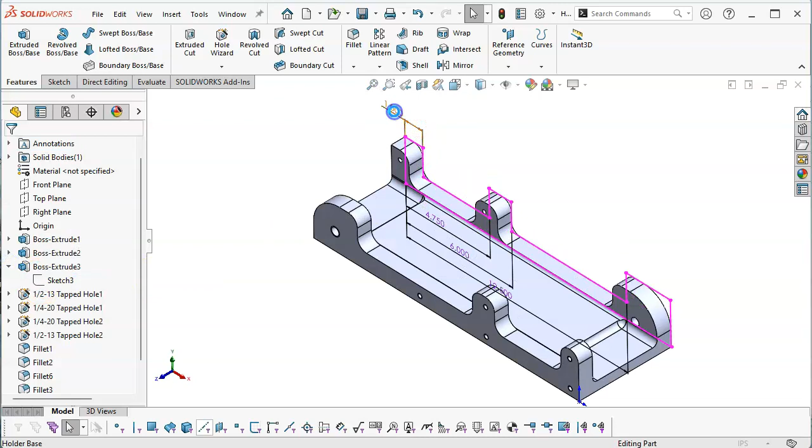Okay, the things you notice after you hit save, we're going to need the 1.5 inch fillets there. 1.5, got an extra decimal there, 1.5. Go ahead and accept. And then on this side, boss extrude 3, that actually came up to be 0.75.

Oh, and I shouldn't have picked that one. I didn't pick that one. So let's rebuild.

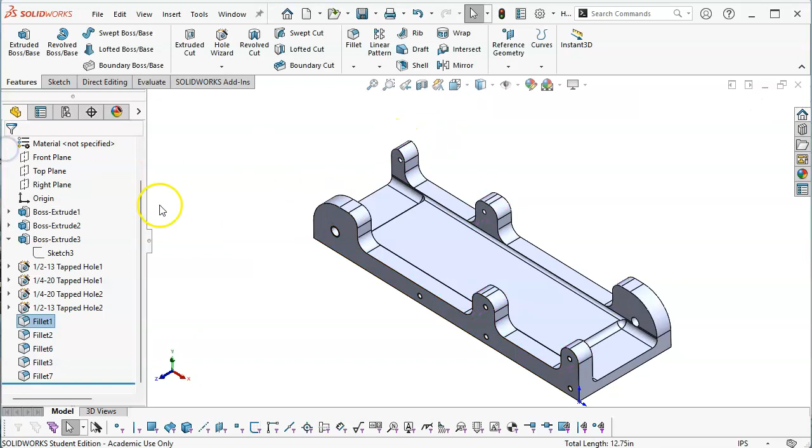And this is going to look a little weird. All right, so on that one, I would be prone to trying to make it 0.375, so you ended up with a nice arc instead of that weird point, or that vertex kind of coming up. But okay, we'll go with it.

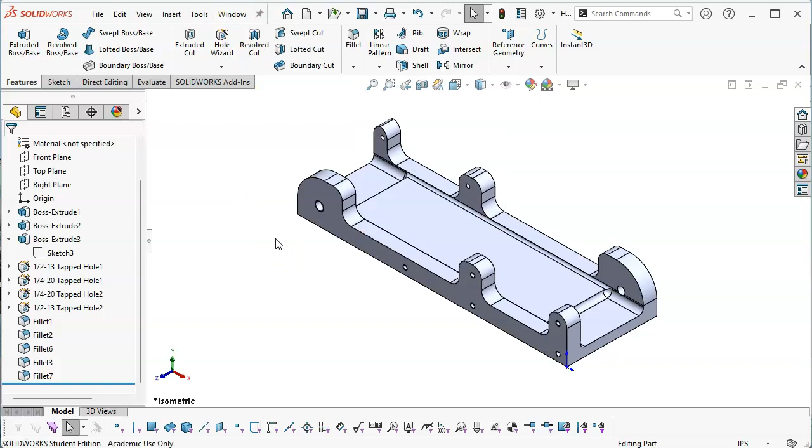All right, since this is the first part, if I check my window real quick, this is the first part to go into the assembly. And so file new, and we'll pick up our assembly.

It is in metric, which is not that big of a deal. And we'll select the holder base. I'm okay, there's no rotation that I need to do, so I don't have to worry about that.

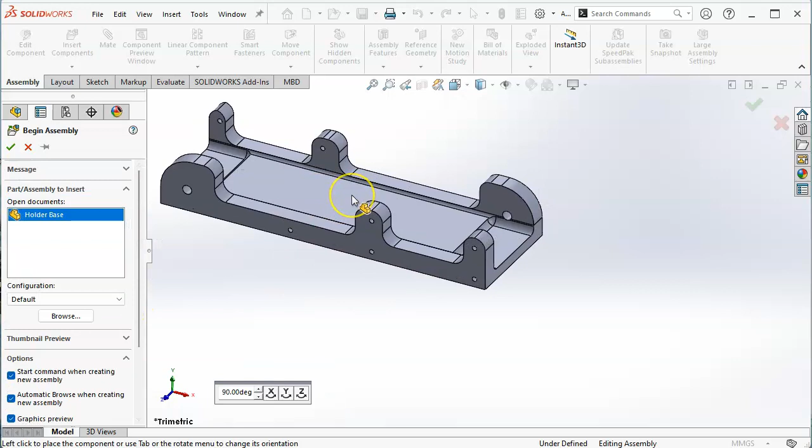Or the right click and rotation. Again, this pop-up box, show rotate context toolbar, if you're not seeing that, that would be the first place to check. I still have one computer system that for whatever reason, it's just going to rotate on the right mouse button.

And most of the time, if we've done our design intent when we bring the part in, it's going to be pretty much in the position that we want.

All right, so just a quick note, I've said it in previous projects, I don't think I've said it in this one. If you need to make adjustments, see something better, this is the time to experiment and do what-ifs and make those choices.

As the mechanical designer, if this is handed to me and they say, hey, we need to design review, reverse engineer, they're no longer available, whatever the situation is, I'm going to look at doing this with the best manufacturing ideas and processes that I currently have.

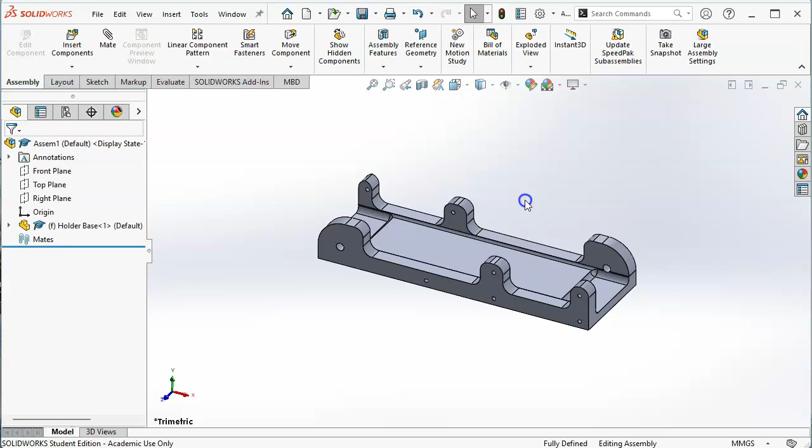So if this was a casting 50 years ago, great, but I still look at this and I kind of shake my head and go, no, I wouldn't be doing it this way.

All right, so insert components, browse, and we're going to go find the holder side and bring it in. All right, so this is a good place to look at our geometry.

And I could edit it here, but keep in mind I can just open the part. If I edit the part, it will edit it in context. There's too much going on here, so let's just open that part.

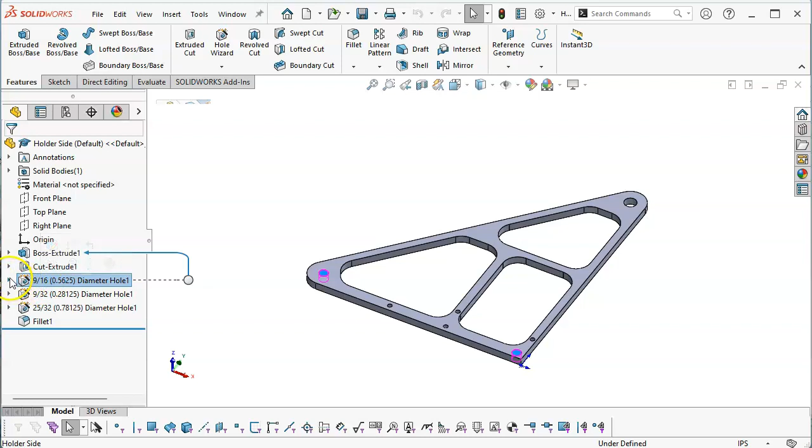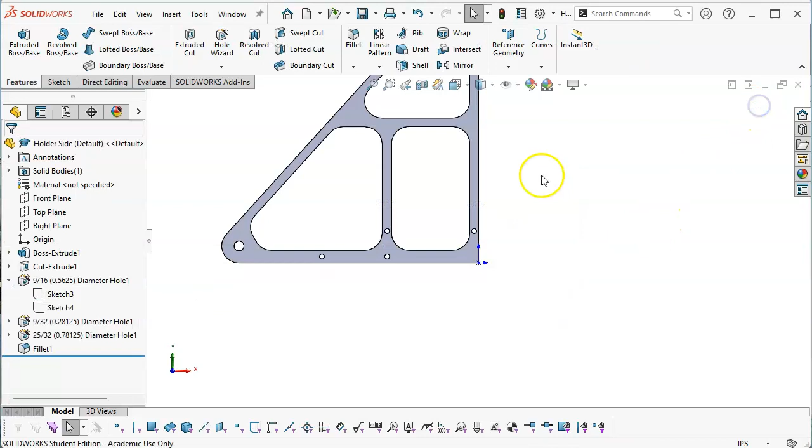If I wanted to verify those numbers, I could make those driven. All right, so just having those there as a what-if.

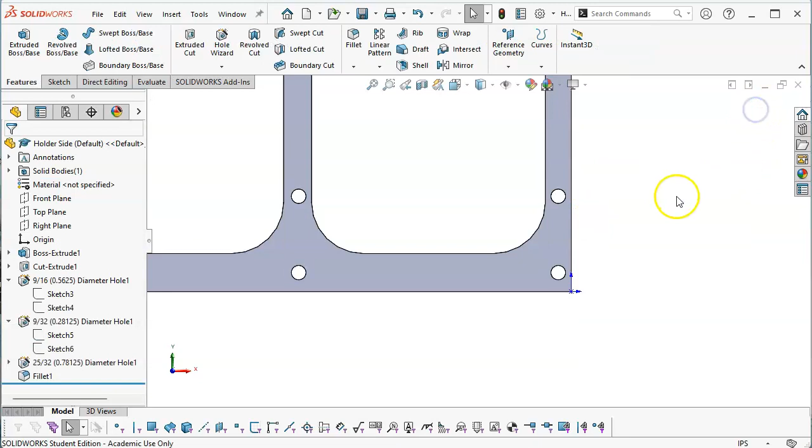All right, and then all of these dimensions, we'll just go back to the point and select control-select vertical, control-select horizontal. And now that we've kind of determined that that is correct, I can close that, let it rebuild.

All right, and then this is going to go to the mate. Coincident, I missed the pop-up. And now that we're in the mates,

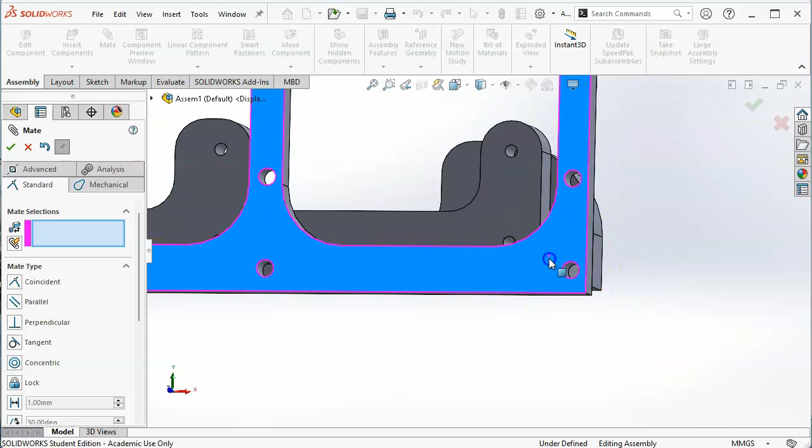I can just go ahead and select my geometry. I don't have to hold down the control button or anything. And notice that we're a little bit shifted. That one looks good, so we'll go ahead and accept.

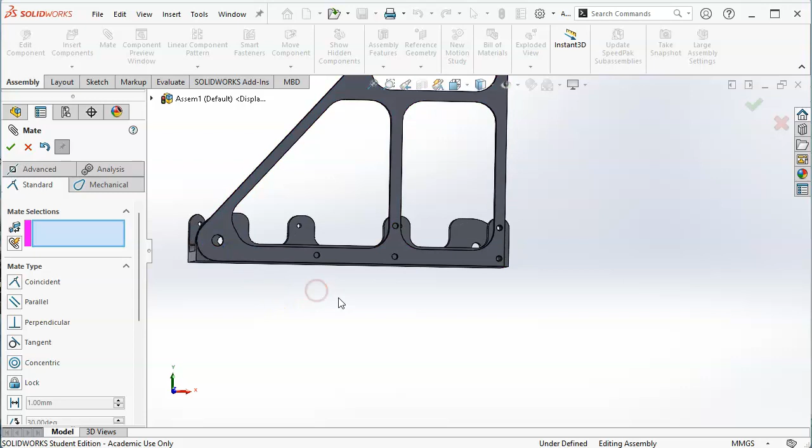That still says this can rotate. So it looks like I missed a dimension somewhere. So either I reversed one or changed one. Since that did not play well...

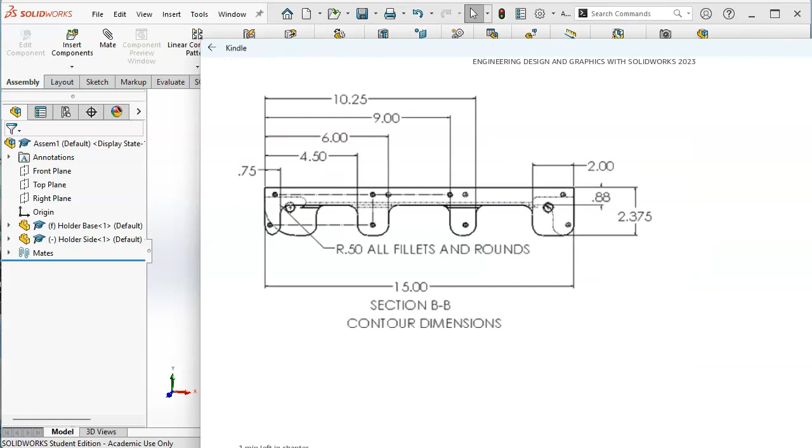Let's go back and double check. 0.5, 0.38.

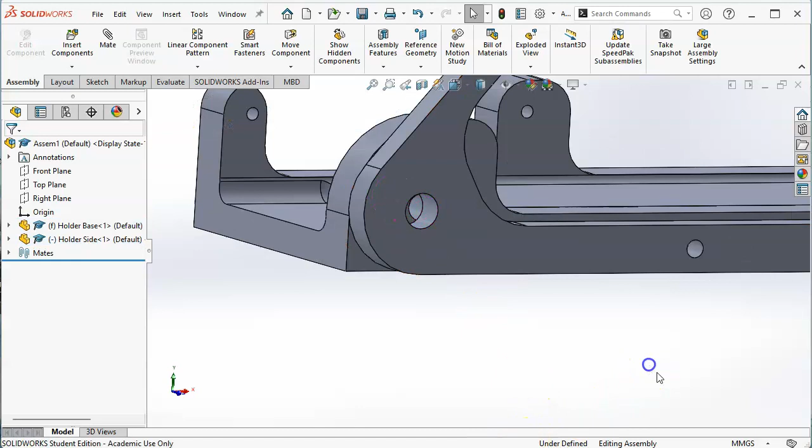Well, let's use our measure tool and find out. Select and control-select. And those are off by a quarter of an inch. And if we go to measure those, 6.35 millimeters, a quarter of an inch, and 6.32.

So let's go ahead and change that over to inch, pounds, and seconds, and double check where I missed my dimensions.

Okay, so since I got, when I changed this one, I wasn't looking at the print. That seems to be the quarter inch because I just automatically made that vertical.

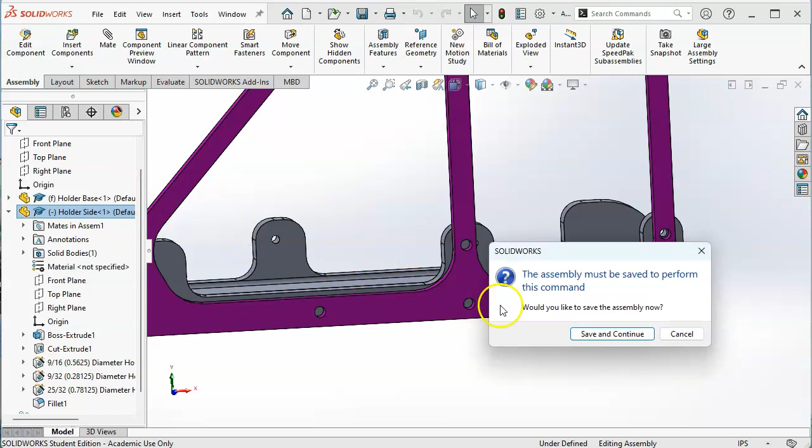So this is a situation where, since the geometry is there, I'll probably just go ahead and edit the part. Save the assembly. So this is my 4-link.

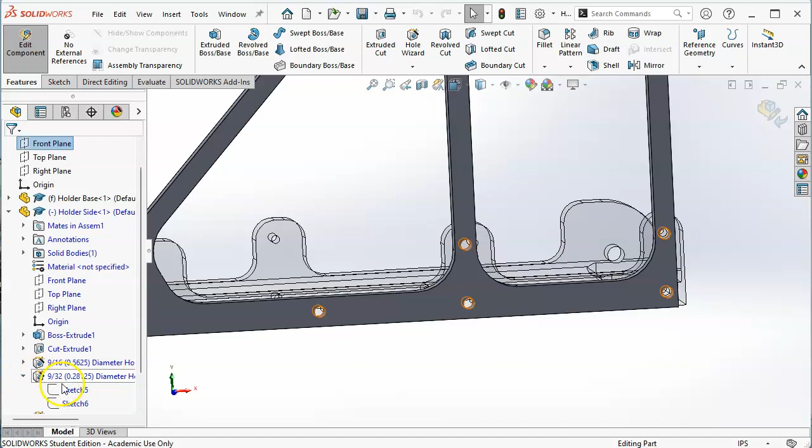All right, and the 4 links come back to the number of pivot points. So everything saves, and at 9/32nds through, I'm going to edit that sketch.

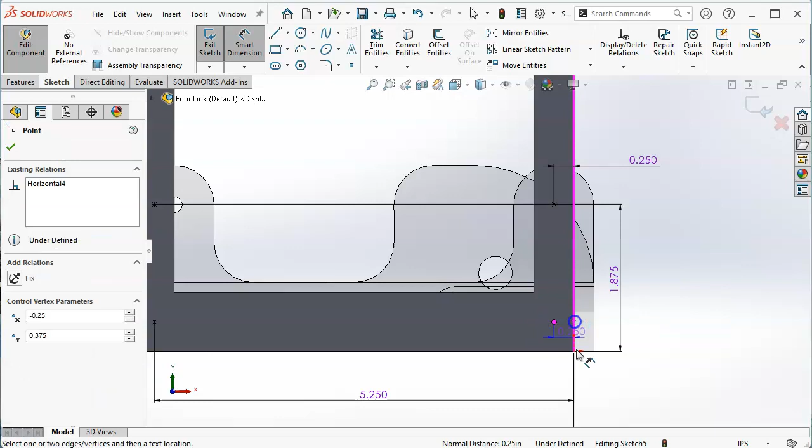When you are editing in context, the other parts go into transparency, and the part that you're editing is in blue. I will still recommend that you be a little careful with using that until you are familiar with the process, and build in little by little. Then once we edit out of the part and rebuild, it looks like I did the same thing.

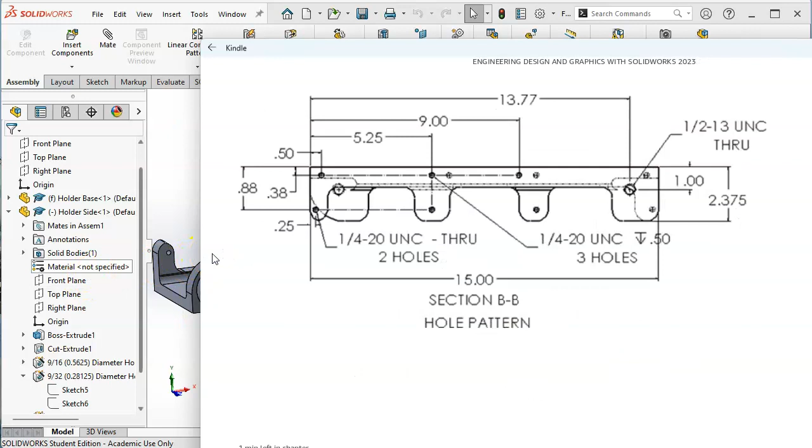So this one, 0.5. So I missed all of those. That one's offset, that one's offset. There it is, it magically appeared.

All right, so since I made those vertical, let's go ahead and hide. Hopefully the multiple iterations as we go through that process, those types of things that do show up or get missed or aren't apparent will be revealed and corrected as we go. So that was the other 0.25.

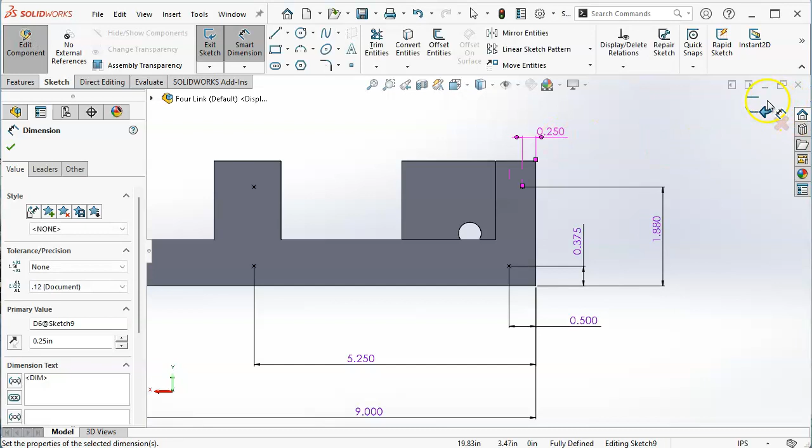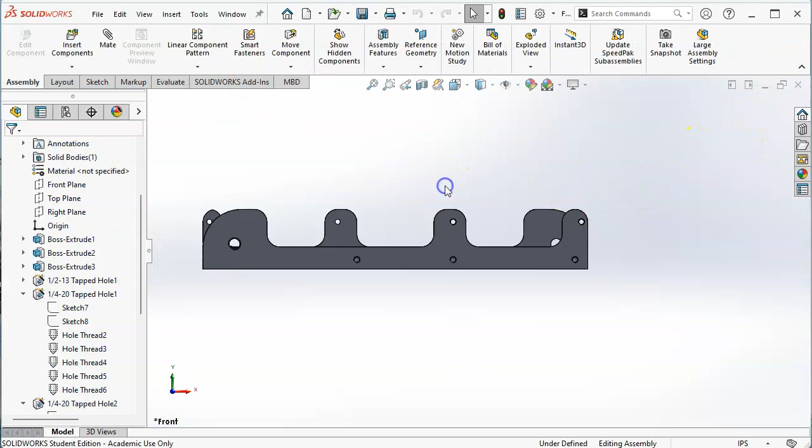And then on this side, we can edit that 0.25. Yep, sure enough, I did it on all of them. Okay, so edit - the part gets closed. And we go back, right-click, and show. If I now have everything correct, all right, we're in pretty good shape there.

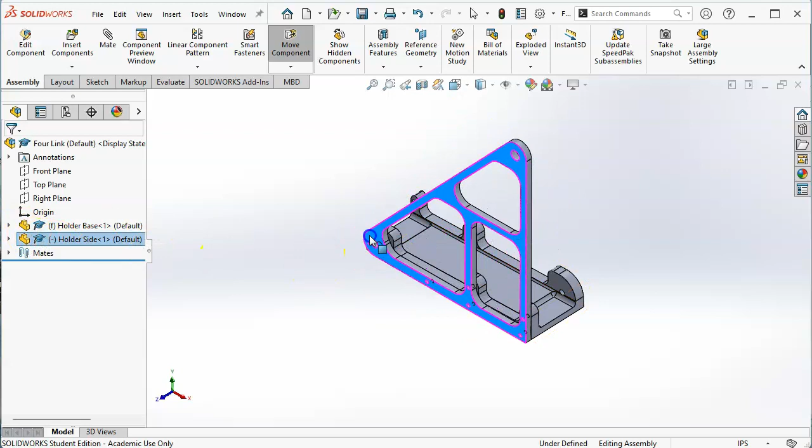All right, so let's bring in - no, it is able to rotate. I look over and I see a minus sign and it's able to rotate. Pick the 2 holes, so we'll go concentric.

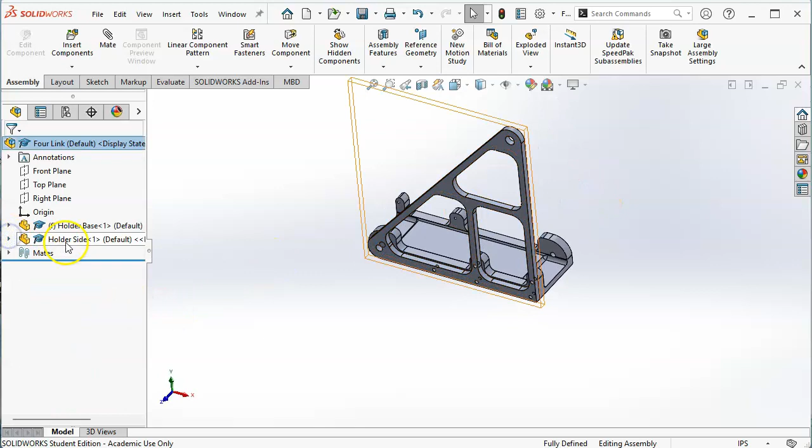You know, it is kind of overkill that one goes to a 1/2-13, so I don't know what kind of loads they're expecting at that point. Yeah, it's a little bizarre.

All right, so let's see, that's in the same position. This face and that face are going to be coincident. Then I'm going to flip the mate alignment so it comes back around the other way. And we want to double check those hole locations for this side.

And concentric. No, we're not locking the rotation, and no, I'm not flipping the mate alignments. So that's all okay. Control select, and concentric.

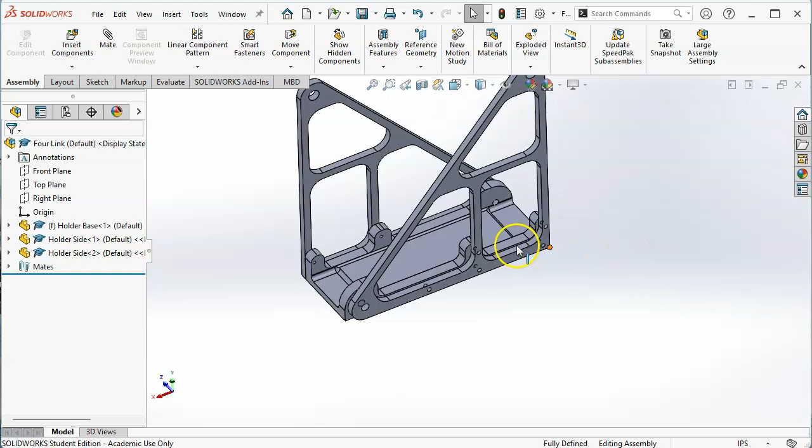And if you don't recognize those symbols, it is something that you can hover over and have it pop up, do the tooltip, and let you know what it is.

Let's see, let's just go ahead and - well, I thought there was an exploded view somewhere. Maybe that was my exploded view from last time.

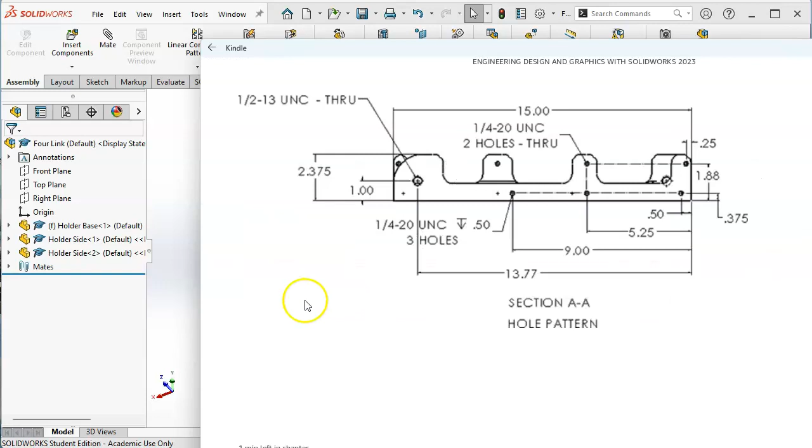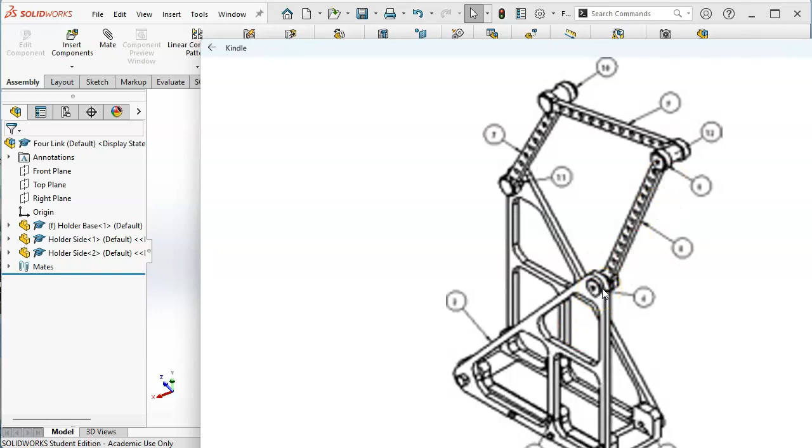Screw. Now that one definitely - that looks like maybe the spacer is to the interior, or the spacers are on the inside.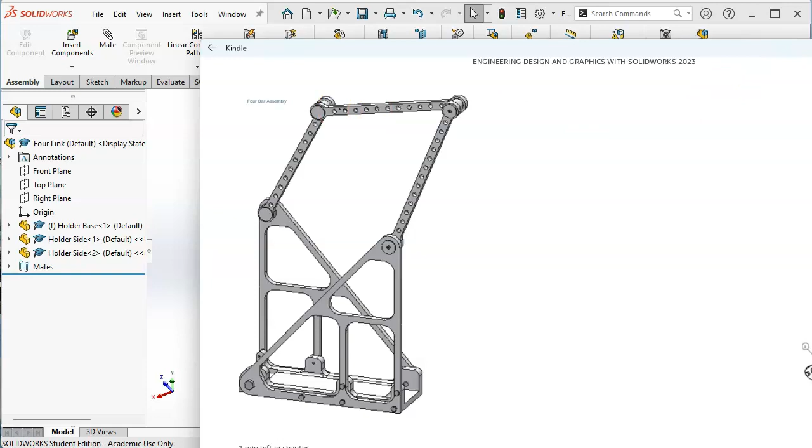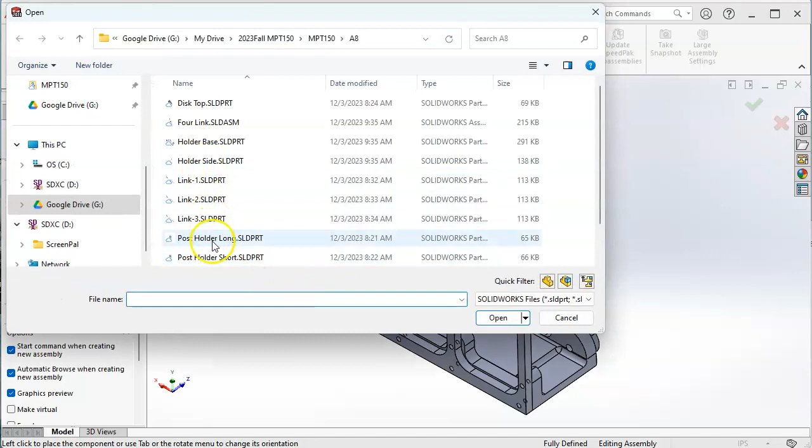Okay, well we need to make a decision, so let's go ahead and bring in the short post, and we'll get it into position. Insert component - we're going to browse post holder short and put that in place.

And I'm just going to go ahead and assemble one at this point. So concentric. Locking the rotation.

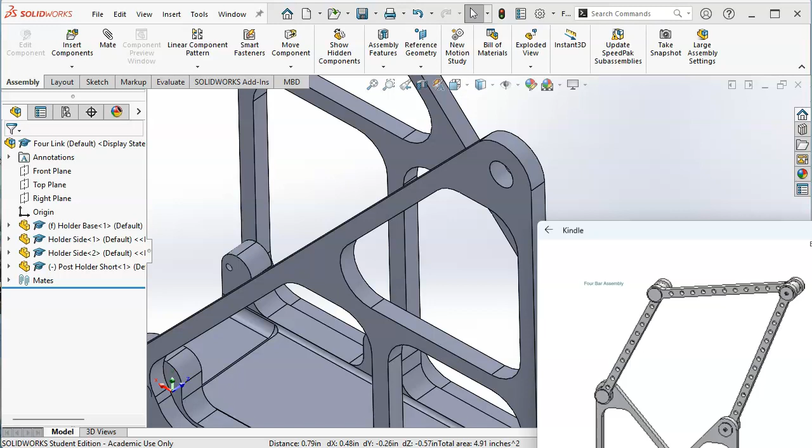Let's see, it kind of looks like that is the disk. So the disk on the outside, let's bring that back. For the initial, I'm going to say that that is going to be coincident.

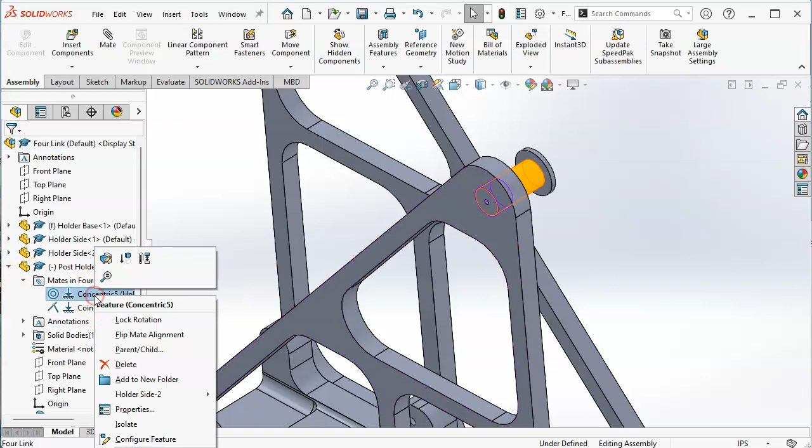Since I didn't see the pop-up, I'll just go back and make the concentric, lock the rotation on the concentric. So, all right, so that is...

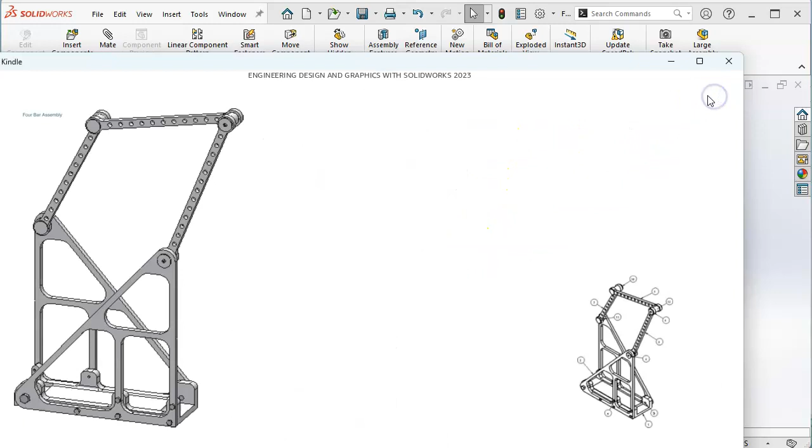Looks like item, well, 4, 8 - it's either 6 or 8. All right, so 8 is link 3.

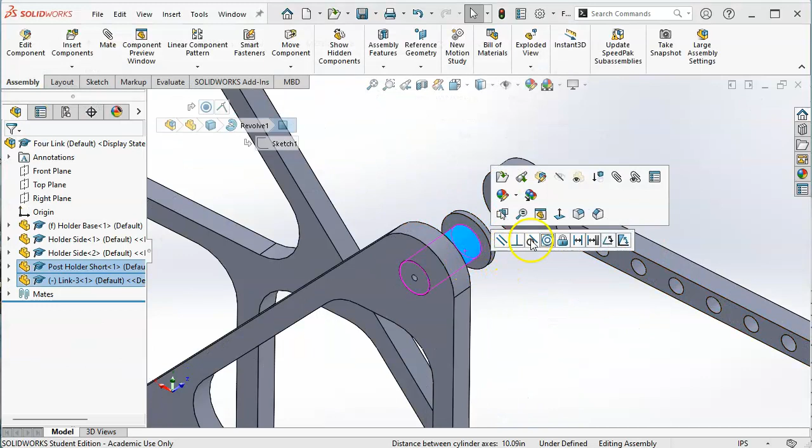So let's bring in the link, existing, browse link 3. And we'll go concentric. No, I do not want to lock the rotation.

Oh yeah, I didn't bring in a spacer. So let's go with the short.

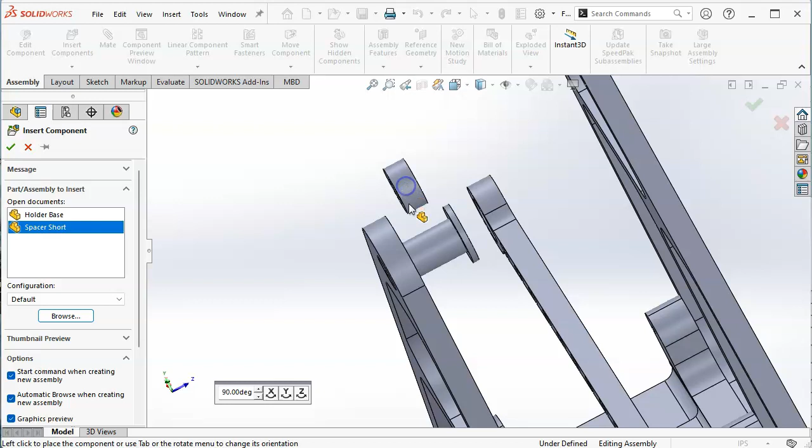And most of the time, I would bring in one of them first, concentric. And no, we don't need to lock coincident. And then...

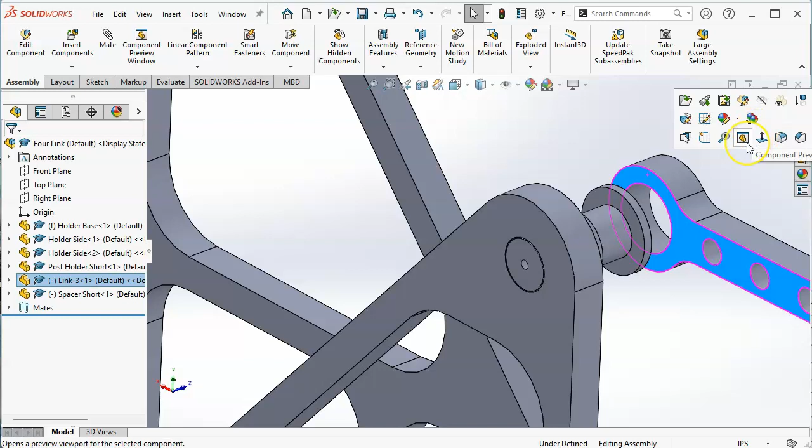Concentric. Yeah, I want to say, looking at this, even with the stack up, I might have missed those spacers last time. Still a pretty good gap there.

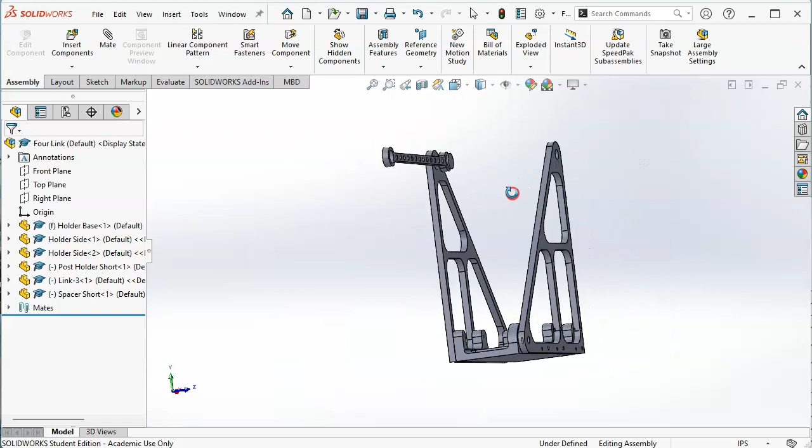A lot of float. All right, so let's see if with the spacer - maybe that one was the long spacer, and we still have contact.

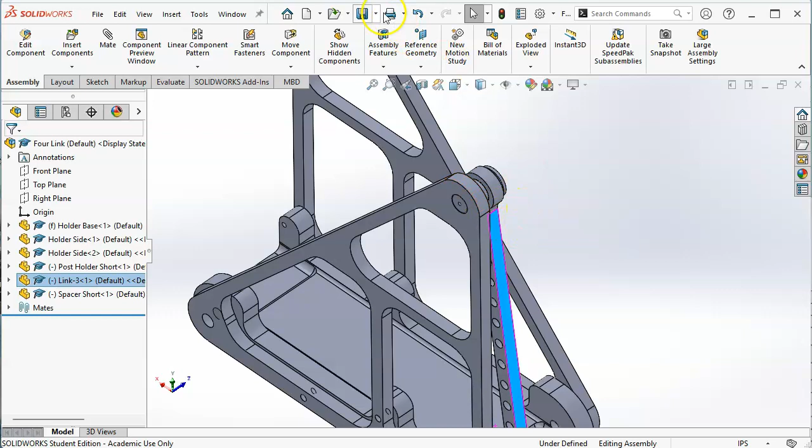All right, so I'm not too worried about the drawing here, but I don't want to get too long on the video because this is where I got myself into trouble. So I'll make sure to rebuild and save.

So on the off chance, I'm going to - let's see, I think that's just off screen somewhere.

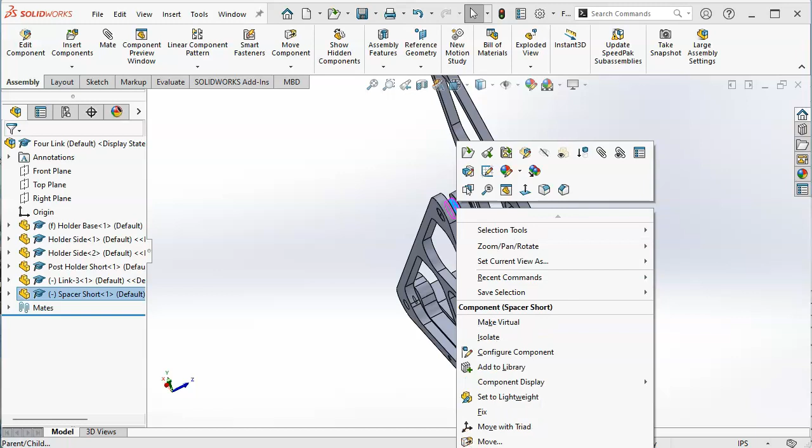There is a replace mates and entities, replace components option. So we're going to browse, and I'm going to replace that with the spacer long.

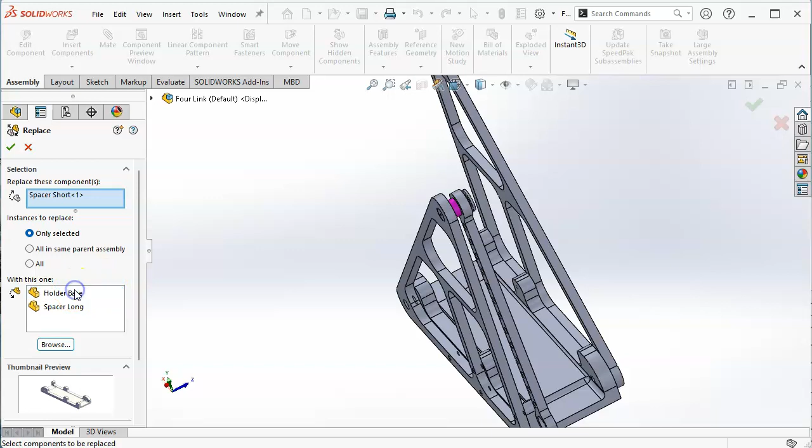And new. I'm not sure why it even picked the holder base, so only selected.

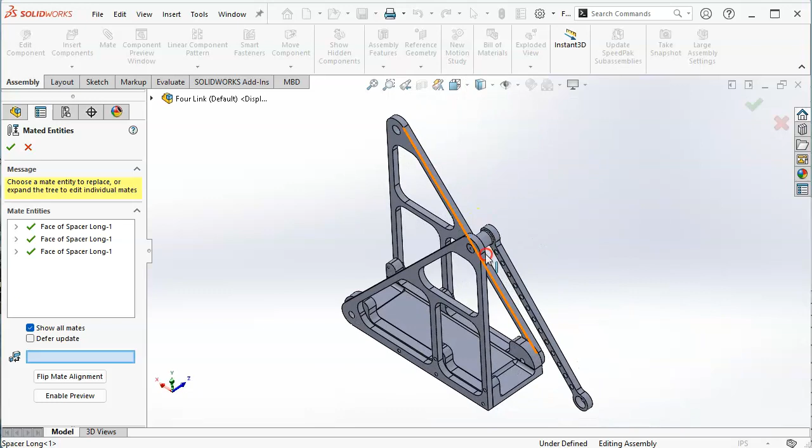Hopefully that doesn't do anything too weird, but that just kicks it. Yeah, that just kicked it all the way off. Alright, so that clears, which kind of...

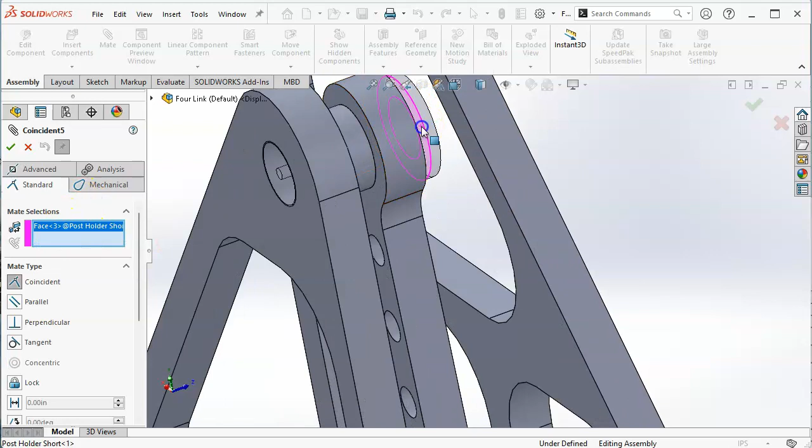Let's see if I can Control Z. The other thing we could do here for our coincident is clear out those selections and go to that face and to that face, and accept it.

And I am still in collision. Alright.

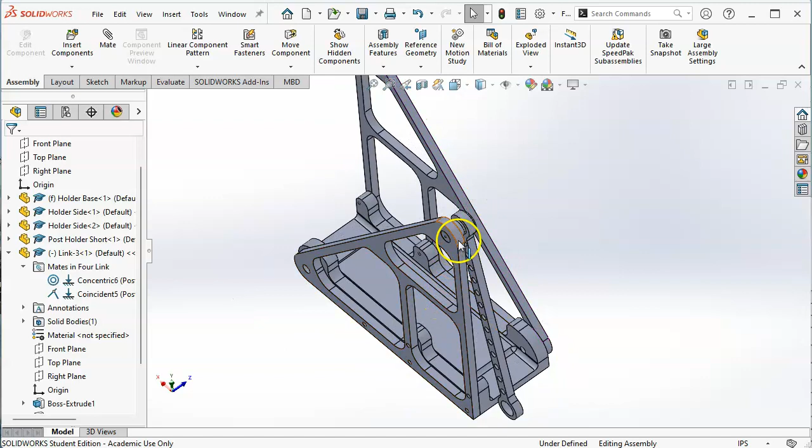So at this point, I still need to bring in the bearing. So I'm going to jump ahead. You should be comfortable enough to stop at this point and replace, or delete and reinsert.

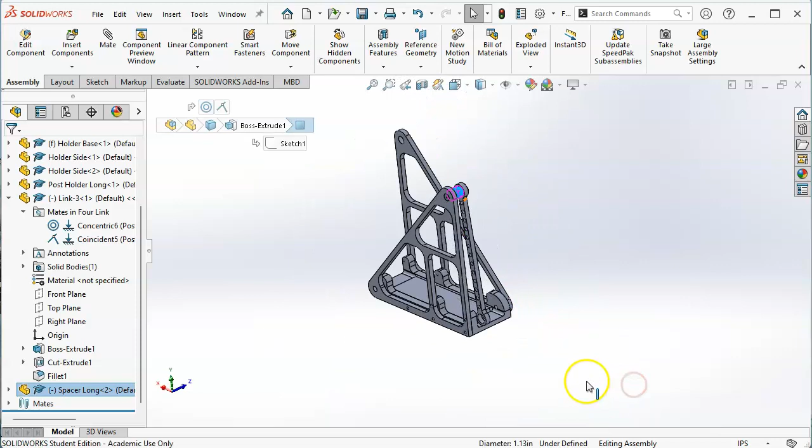Okay, I made my replacement and analyzed the result, and have a little bit of interference. So the 2.38 still doesn't quite line up, and I still need to put the bearing in, but we have the clearance there.

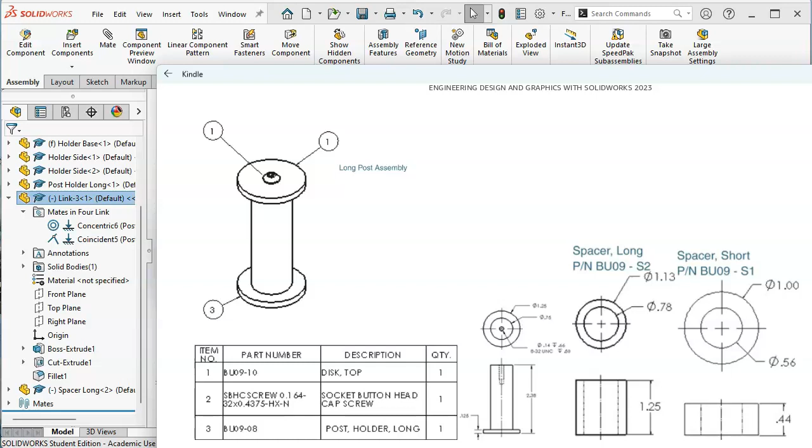And I checked the 1.25 and the 2.38 and the 1/8 inch. That doesn't quite line up. If we had the 2.38 from there to there, then I think that will give us the desired result.

So I wouldn't want to inset this 1/8 of an inch and then stack up. We're going to put this in bind.

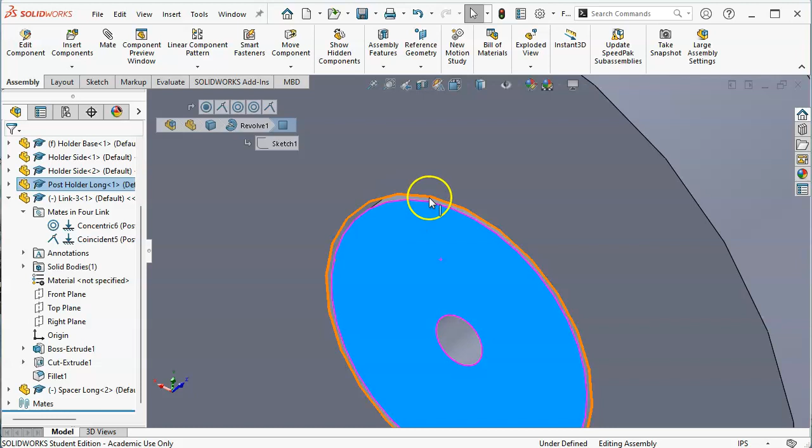So at this point, the 0.78 clearance with the 0.75, we have a lot of clearance there. So this is going to have a tendency, if it binds here, to spin here, which then the bearing isn't doing what it's supposed to do.

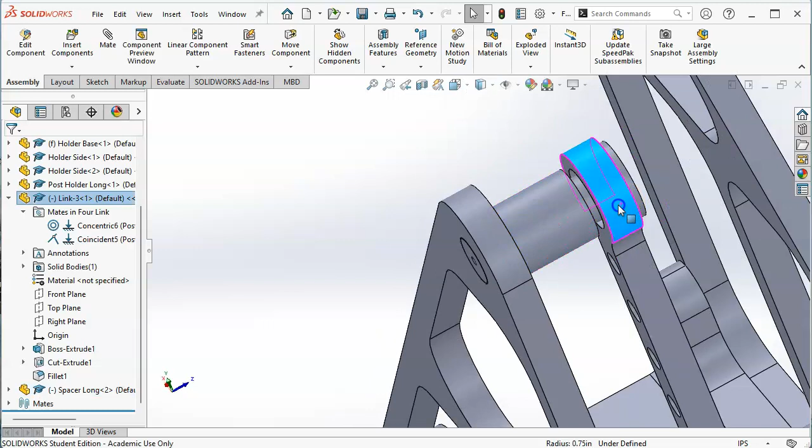So my first correction, my thought here, is to make this 2.375 and save it, then close it and see if that makes an initial fix. Well, either that or visually it looked like it was inside.

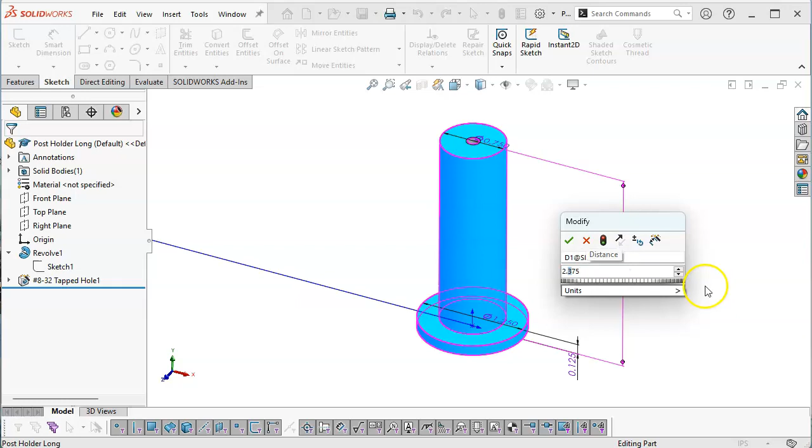What did we have? No, I guess it was right there. So that's still at bind. Let me change it back and rebuild. So that might have been my rounding error if I stayed at the 2.38.

Yeah, now it's not looking like it's internal. So that stack up, though, that is a little bit of a concern.

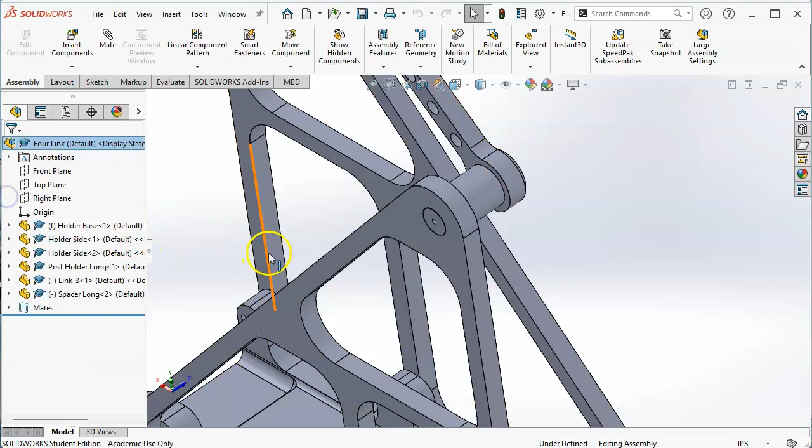Alright, so let's go ahead and bring the disk in. Instead of just thinking through the process and trying to do the general accounting.

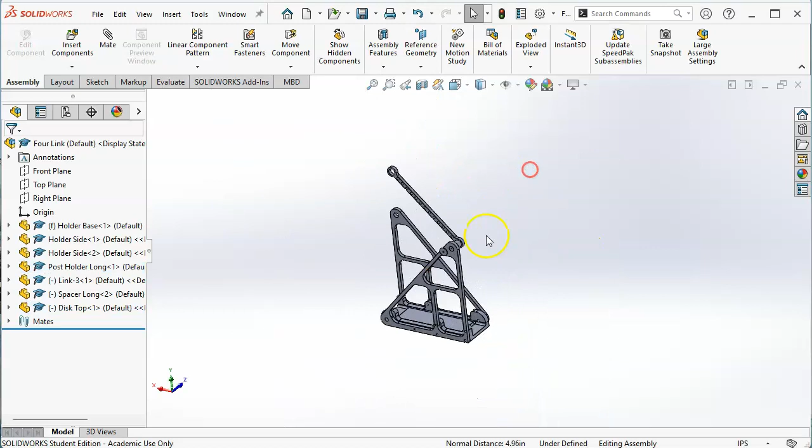Alright, so that becomes coincident. And wherever it threw it, oh, that wasn't too bad. Let's go with the hole locations, concentric, and we'll lock the rotation.

And it didn't disappear, so I need to double check. Yeah, thought I clicked on that.

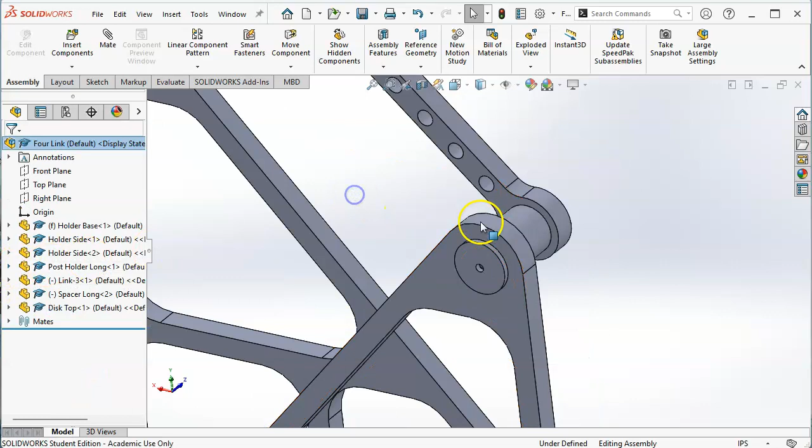Alright, so 3, and then we need to jump back a little bit, and I'm going to go to the other side, and let's go.

So that looks like 8, maybe 7.

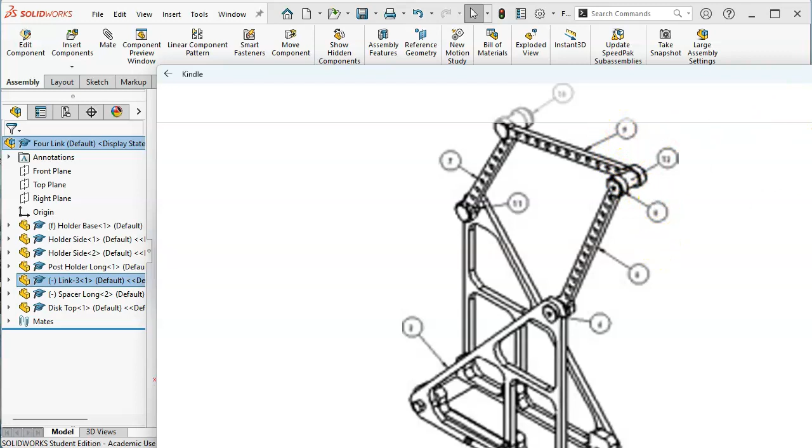See what our numbers are. So that one looks like the shortest one. So 1, 3. We'll see if they all clear.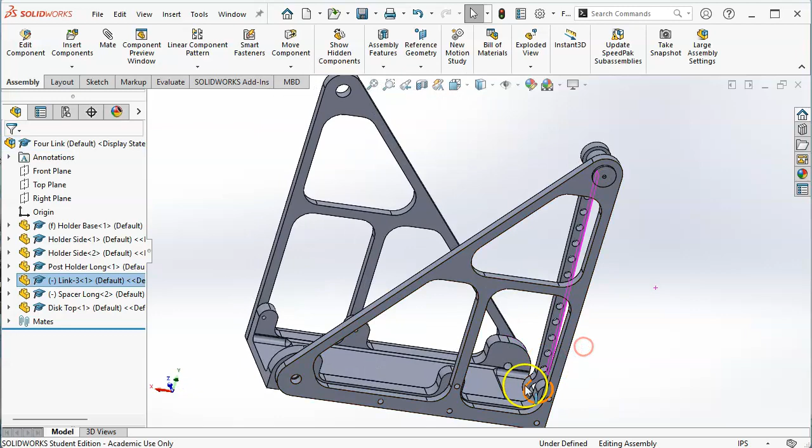And nothing there. And the relief. Nope, there it is. Alright, so that one's still an issue.

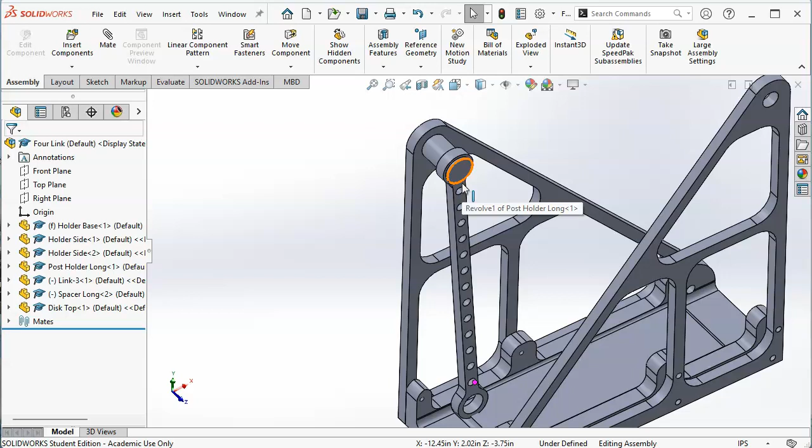Alright, so if this was the configuration, I would just change the configuration, which we'll take a look at. As it is, I'm going to have to replace it. So let's do that one more time.

If you got these replaced okay, this shouldn't be an issue, but just to review it, just off screen is my replace. And I'm getting a pop-up.

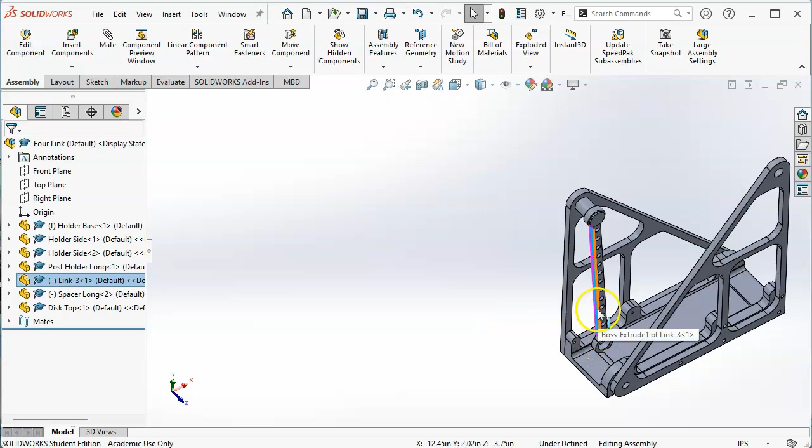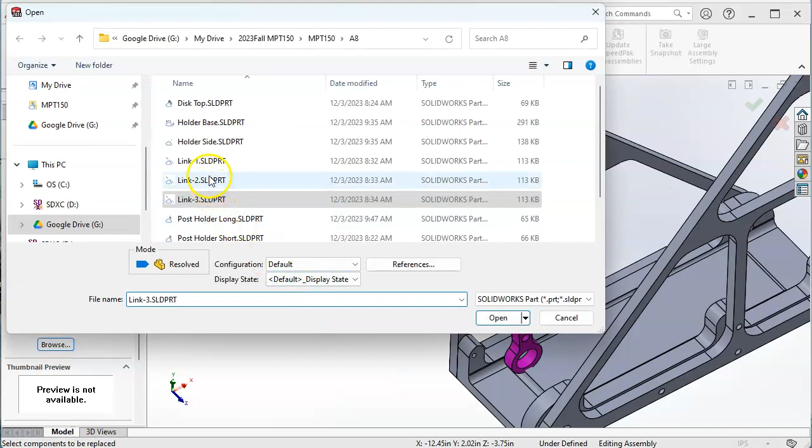So kind of towards the bottom of that guy. So let's see, if this is the long one, we would need to be maybe item 2. So 2 was the 12-inch.

Alright, so that one still has some length. We'll let it do the replace. Alright, so I'm going to go ahead and stop the video here, and we'll come back with the toolbox items and then run through the rest of the geometry.